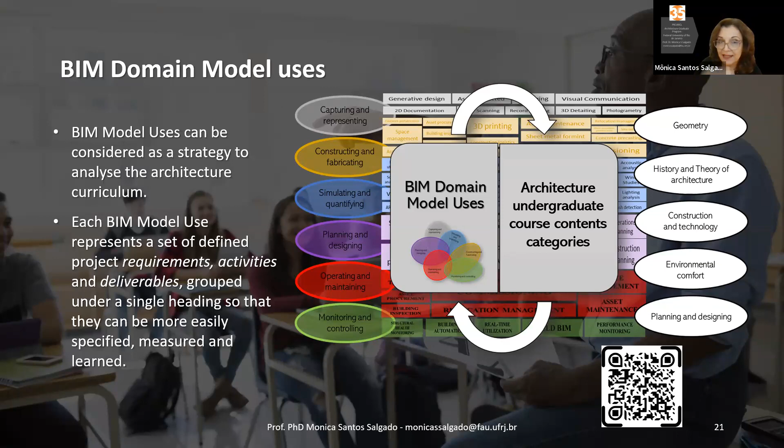This is part of the research we are developing. And there are other ongoing actions. For example, we are promoting workshops with professors and BIM experts, so they can discuss the possibilities to incorporate BIM in their classes. There's also BIM cell laboratory installation, with some new computers and support so we can work properly with BIM tools.

The creation of a new class entitled BIM in Architecture Education, which has been offered to master's and PhD students of the Federal University of Rio de Janeiro. It's very interesting because although the title is BIM in Architecture Education, we are receiving students from the civil engineering graduate course. So this class called the attention of different students from different parts of the university.

And the results were so promising that we are now organizing a book with some of the suggestions and solutions presented by the PhD and master's students participating in this class. We intend to publish this book at the end of this year.

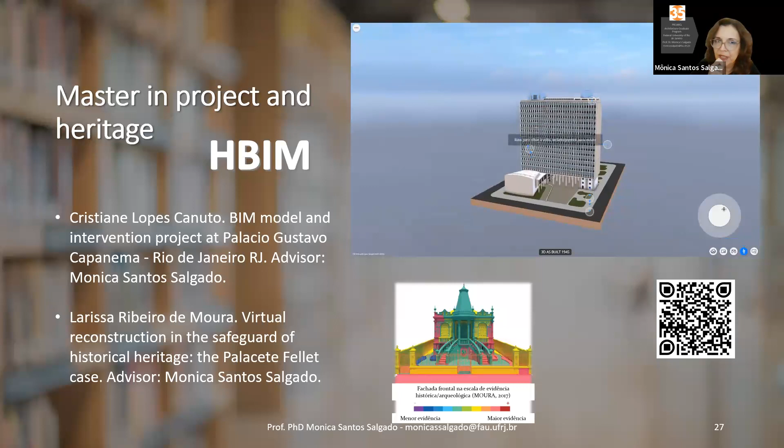I had the opportunity to be the advisor of these 2 recently presented master's theses in project and heritage. The first I'd like to share had been developed by Cristiane Canuto, entitled a BIM Model and Intervention Project at Palácio Gustavo Capanema, developed under my supervision. Cristiane Canuto, who is an architect, decided to reconstruct digitally the Palácio Gustavo Capanema, an important Brazilian building and a very important representative of Brazilian modern architecture, located in Rio de Janeiro city.

She decided to reconstruct it digitally and to propose an intervention on the last floor of this building, because it has a beautiful view of the Guanabara Bay. If you haven't visited my city, please, I will be very happy if you come here to visit. This model had been prepared using ArchiCAD, and through this QR code you can download it. It is online through the BIMX website of Graphisoft, so you can download this model.

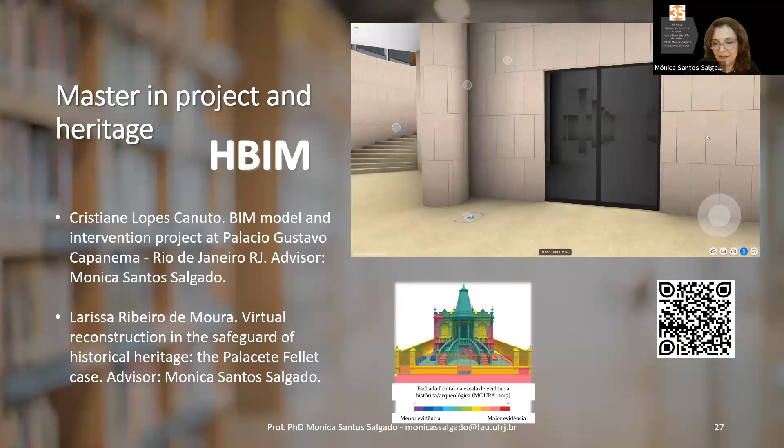Cristiane prepared 2 models of this building. The first one is the model as it was originally projected, the original model. The second one is from 1945, what has actually been built, because it has some changes from the original model. One of the architects on the team, the dream team, the author of this Palácio Gustavo Capanema building, is Oscar Niemeyer.

So this building is very important for us, and I invite you all to get this BIM model through this QR code here.

I also had the opportunity to be the supervisor of Larissa Moura, who developed a research entitled Virtual Reconstruction in the Safeguard of Historic Heritage, the Palacete Fellet case, a very old building in Juiz de Fora, the city I mentioned before. It was in very bad condition when Larissa started her research.

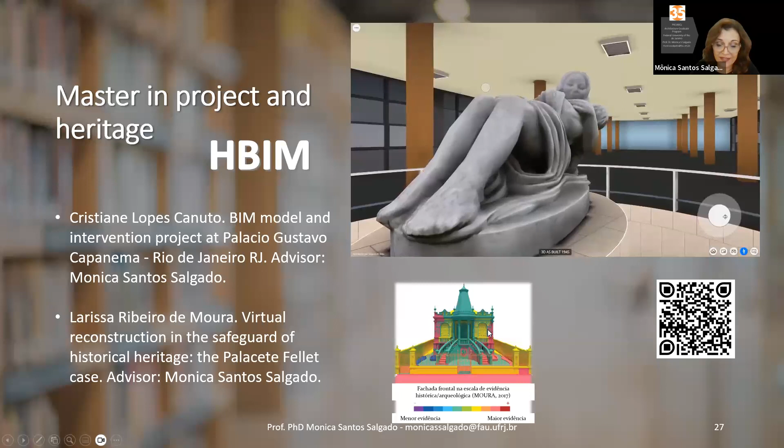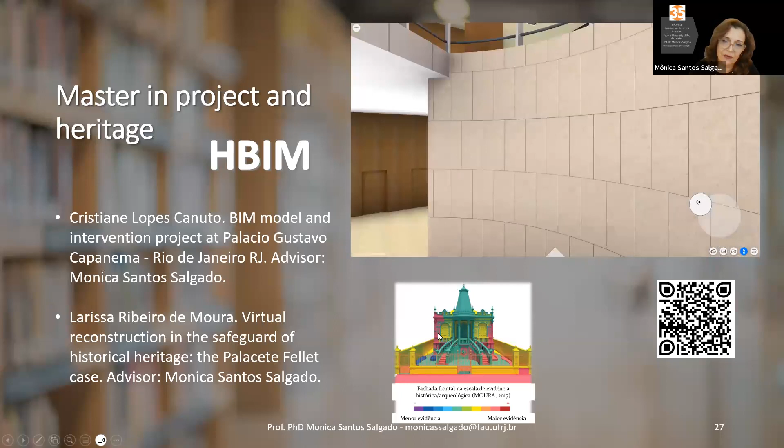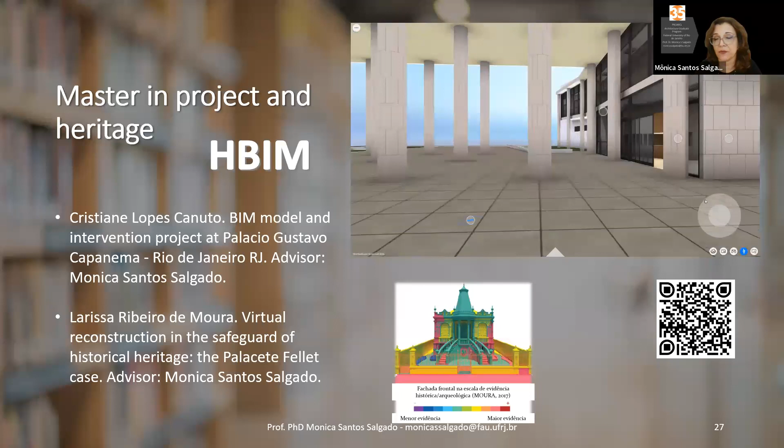In the bottom part of this image, the reddish part represents details for which Larissa was able to obtain architectural evidence. The bluish part represents details she only had information about through photographs, paintings, and other records, because the building, unfortunately, is in ruins. What's important is that both students explored the possibilities of what we call HBIM, heritage BIM, historic BIM. These 2 research projects show us some possibilities, for example, for using BIM during undergraduate courses.

Another research I had the opportunity to advise was developed by Bianca Leal, using the BIM platform in teaching architecture, challenges and propositions. I can say this was, in fact, the beginning of BIM Cell. The development and approval of this research was the beginning of the discussion of BIM Cell in my institution.

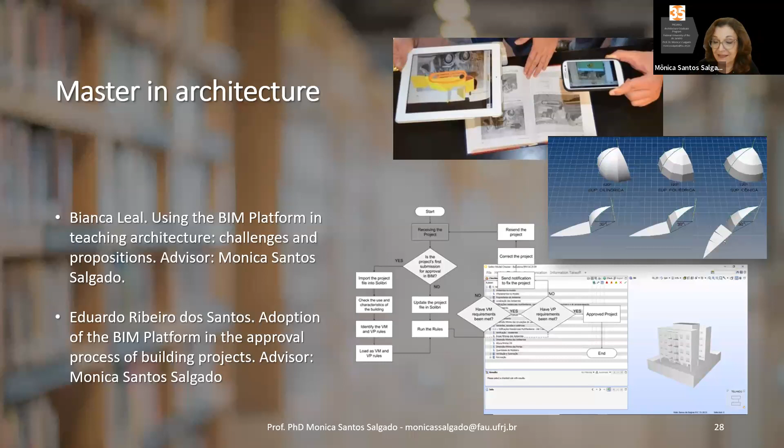I also had the opportunity to advise the master's dissertation developed by Eduardo Ribeiro, which explored the potential possibilities of adopting the BIM platform in the approval process of building projects, or in verifying rules established by building regulations, to support architects and facilitate their work, because there are many rules and regulations that must be considered, not only in my country but all over the world. Building information modeling can help professionals in this task, this challenge.

I'd like to share another PhD - the others were master's dissertations, but this is a PhD I had the opportunity to supervise together with Professor Eduardo Toledo, a professor from the State University of São Paulo. Cristiane developed a BIM macro adoption instrument for automating maturity assessment on the noteworthy publications component.

Cristiane at first intended to prepare instruments for all 8 components of this macro maturity model, but of course it wasn't possible, because it's very complicated - it's not easy, it's a big challenge. So she decided to work on fortunately only one component, which is this one, noteworthy publications.

She developed this instrument to analyze BIM maturity in the country, considering the publications. I'm very proud to have been the supervisor of this research, because after this PhD was approved...

Another doctorate in architecture I'd like to share was developed by Fabiana Dias, entitled Management of the Project Process in the Rehabilitation of Buildings, Aiming to Improve Environmental Quality. That may not have been the exact title, but this rehabilitation project analyzed by Fabiana was done in BIM.

We also had the opportunity to publish this paper in English. So if you want more information about this research, you can scan this QR code here and access the paper published in English.

The analysis had been conducted adopting the fault tree analysis method, FTA analysis method. Unfortunately, BIM had not been adopted since the beginning of this design management process, and they faced many problems because of that. You can have more information through this QR code.

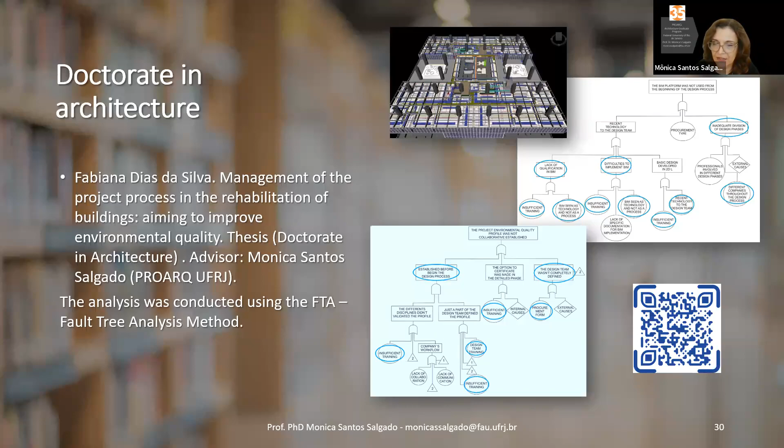Now I'd like to share some of the ongoing research that we are conducting at the Federal University of Rio de Janeiro. I am advising three master's dissertations and three PhD theses, doctorate research.

Among the master's dissertations, I'd like to highlight Raissa Bezerra, who is discussing quality management for BIM implementation. Raissa is an architect from the architecture department at the Federal University of Rio de Janeiro, and she is very concerned with the exigencies of the new bidding law. She understands that through quality management system requirements, she can help organize a new approach inside her department, so the architecture team and design team can work properly through the challenges of building information modeling methodology.

Camila's research is very interesting because she intends to analyze the role of the student body in the dissemination of BIM. We have a BIM cell, as I presented before, with professors discussing BIM, but we also have some informal initiatives that came from students interested in building information modeling. These students are discussing BIM with or without professors, and they are disseminating it among their colleagues. These are students from the undergraduate course, not the graduate course. Camila is analyzing these initiatives.

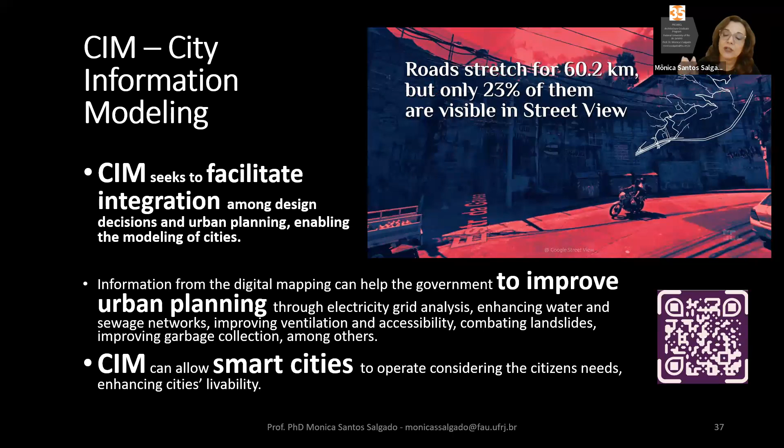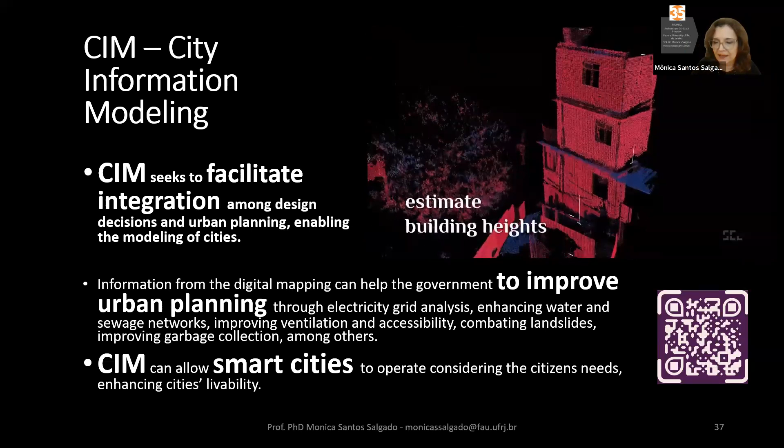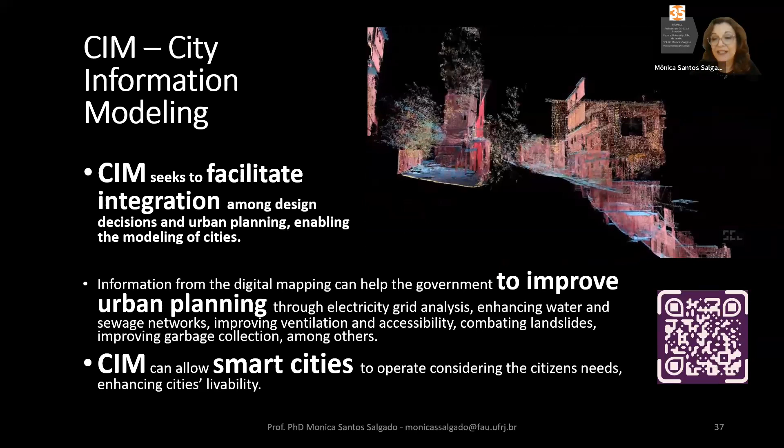MIT decided, together with the mayor of Rio de Janeiro, to map Rocinha. Rocinha is one of the biggest slums, the biggest favelas, that we have in Brazil. It's very difficult to plan the urban services we want to achieve the necessities of the citizens in this complex urban settlement. So they decided to get, through point clouds, all information about the buildings, particularly in the main street of this favela, in order to think how to best operate these urban planning decisions to improve the life of the citizens in this important settlement.

So CIM, city information modeling, can allow smart cities to operate considering the citizens' needs, enhancing cities' livability.

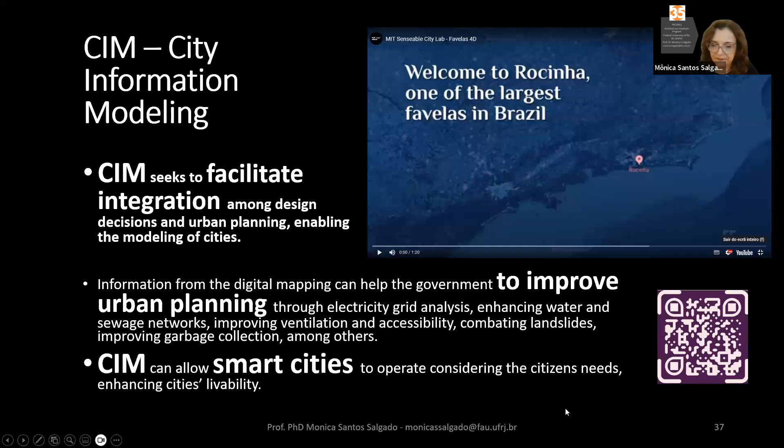There are 5 important vectors, the main vectors of smart cities: digital transformation, urban environment, mobility, governance and finance, and inclusive and sharing cities. Each of these vectors works with specific questions to be fulfilled, to be answered, and some measures that must be adopted in urban planning.

For example, when we think about mobility, how can we fulfill the promise of reducing travel time and saving money with environmentally friendly options? For inclusive and sharing cities, how can cities cope with the future of work revolution while ensuring no one is left behind? These are some of the discussions we have during the Smart Cities Conference all over the world, and we think they must be answered properly.

So we think it's not only that a smart city must be sustainable, but also that sustainable cities must be smart. When we think about digital technologies, we experienced this during the COVID-19 outbreak - the importance of digital transformation so we can go on with our lives, although we were facing a very difficult period. That is why I'm going to talk about BIM, CIM, and COVID-19.